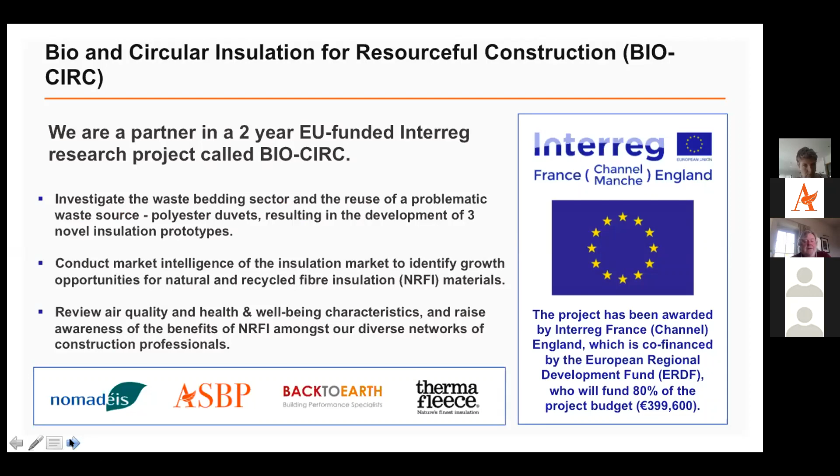So we've got a few upcoming Alliance for Sustainable Building Products events for your calendar. You'll know that the Environmental Audit Committee has called for an inquiry into the sustainability of the built environment, and that consultation is open now. I urge you to look at it and respond to it, and we will be doing that. It's a very broad ranging inquiry, and it's not necessarily that we're going to respond to everything, but we're going to have an event discussing it in more detail. There are a number of different subsections that have been broken down, so we'll look into that in more detail and help you put in your submission.

On the 10th of June, we've got an event with CIBSE on TM65, looking at embodied carbon in building services, often overlooked and forgotten, but you'll find it's a big chunk of the pie when it comes to embodied carbon. Then as part of Circular Economy Week London, we've got an event looking at metals and the circular economy, and there's some quite encouraging stories to tell about how the circular economy is working.

And then around July time, we're not quite sure of a date yet, we're going to be looking at timber innovations across Europe with Nature Plus, our colleagues in Germany. We'll give you more information. Sign up to our newsletter, of course, to be kept up to date.

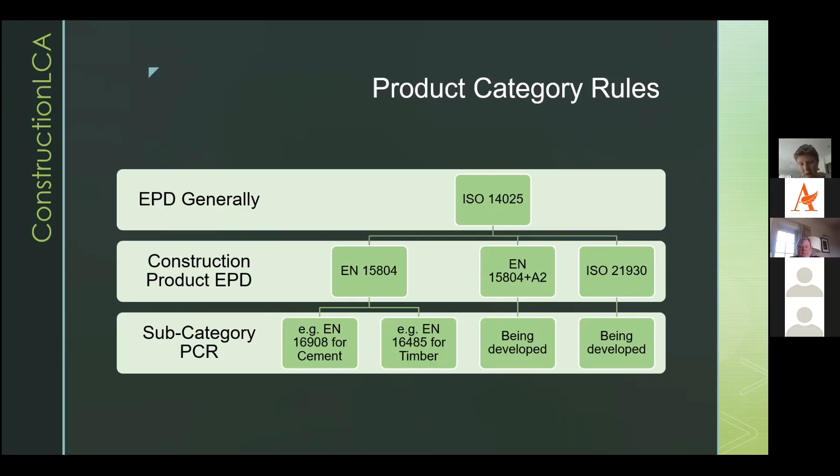And in terms of product category rules, for EPD generally, there is a standard called ISO 14025, which sets the rules for all EPDs, but it's really quite loose. So if you did an EPD to 14025, you could really still decide how you wanted to assess your product. So because of that, we've developed the product category rules for construction products EPD, and that's been done in both Europe with European standards and internationally with ISO standards. So we have EN 15804, the first version, and then EN 15804 plus A2, which came out quite recently and which is starting to take over, and then this ISO standard.

Effectively, the rules for all of these are very similar, so at least if you're looking at global warming potential, so just embodied carbon and the carbon impacts of products, these are reasonably interchangeable. The core rules are the same. There are some differences between these two standards in terms of the indicators, and I'll talk about that. Other than that, there aren't real differences, and this one also makes quite a lot more information and detail mandatory. And then underneath that, we have what we call subcategory PCR.

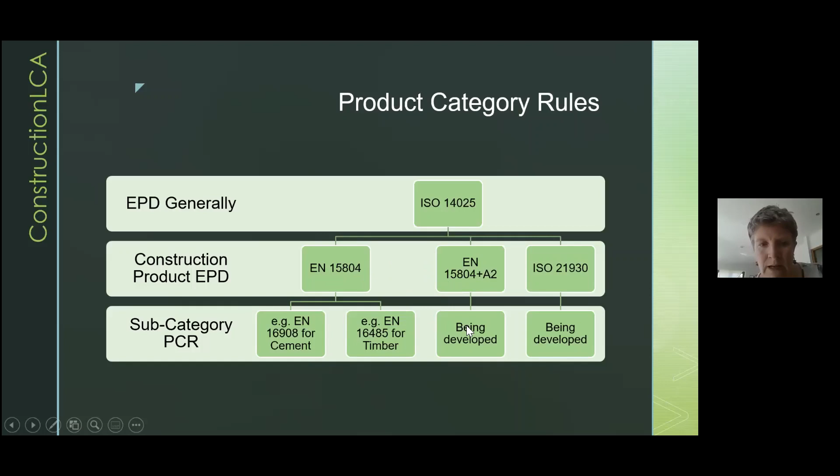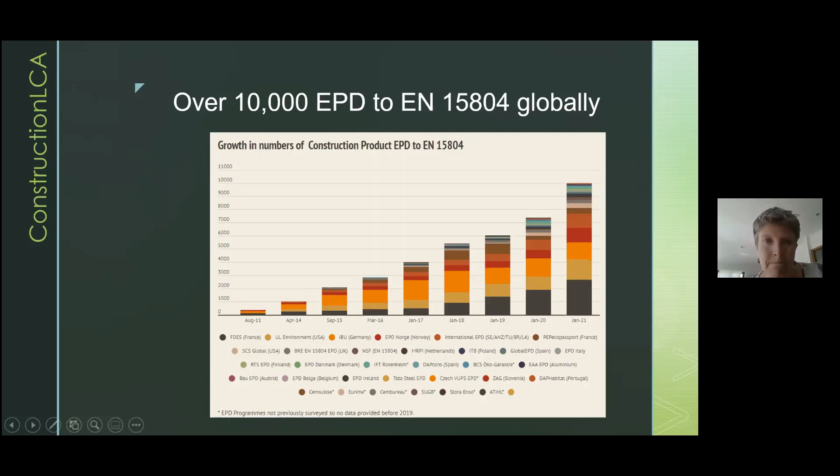There are lots of EPD now available, so I've been tracking the numbers, and we're now up to just over 10,000 EPD. These are the number of EPD actually published and registered as PDF documents. Some of these EPDs themselves cover lots of products, so there are a lot more products covered by EPD than just that 10,000. And then there are EPD tools that allow manufacturers to provide specific data for a product on demand, so there is lots more information than is shown by this. For example, in North America, there are 1,000 EPD that cover 25,000 products. And in France, you've got 1,300 EPD that cover 67,000 product lines. So there is quite a lot of data out there.

We have got lots of briefing papers that we've produced with the ASBP. So if you've got more questions, have a look there. They cover what EPD are, how to use them, where to find them. And then we have an online list of EPD for UK produced products, which you might find useful.

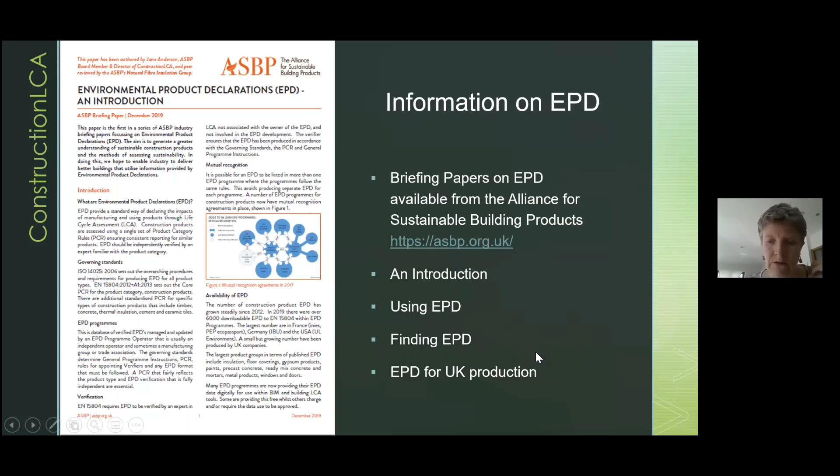Okay, and just a quick overview. In terms of EPD programs, there tend to be EPD programs all over the world now. Across Europe, we have an organisation called Eco Platform that tries to ensure that all the programs have a high level of checking of the data, that they make sure that the verifiers are well qualified, and that they're following the Eco Platform guidelines for verification, which are detailed and go in excess of the standard in terms of their requirements. So Eco Platform is a good place to look, and they're now moving to list all the EPDs that are produced by Eco Platform members.

There are other program operators, and they're listed in one of the briefing papers. There's also data available through national databases, so generic data that isn't an EPD but is the typical impact of those products. There's lots of digital resources now, and then trade associations provide EPDs through their own programs sometimes, and then manufacturers' websites as well. So are there any questions?

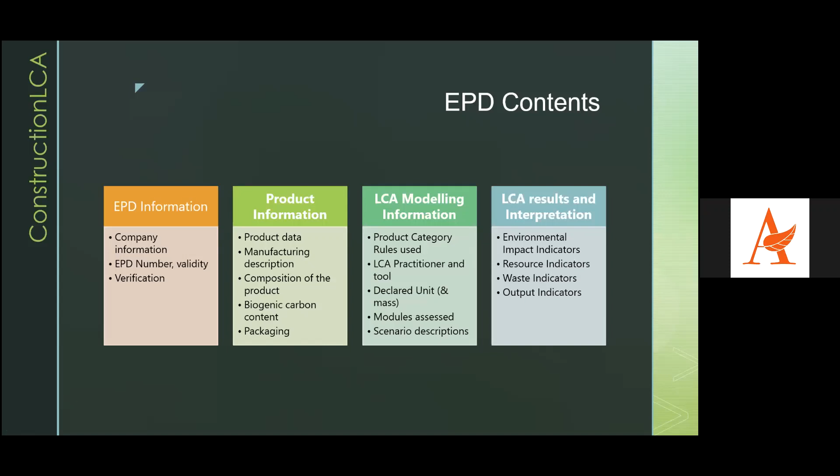I can see there are some questions. We've got a couple of questions, Jane, so we'll have a pause there. Morning, guys. I've got a quick question. Can we unmute them? Let's just see if they have a mic. If not, we can perhaps ask it for them. Sure, brilliant. Can you see this one, Jane? Perhaps do you want to read it out yourself? Is that easiest? Okay, sorry.

Could you say anything about EPDs and their visibility on systems like the NBS? I can't say anything about the NBS, actually, I'm afraid. I know that the NBS are aware of EPDs. Hopefully now that lots more of them are available digitally, that's going to be something that will improve. But I don't know.

Just remind us, NBS, what that stands for, and who runs it? National Building Specification. It used to be owned by RIBA, but it's now an independent organisation. It provides default specification and tools. It would certainly be good if it linked, and that would enable you to specify on the basis of information in the EPD. But I have talked to them, and I know that they do know about embodied carbon and are looking at it. Hopefully it will come in if it isn't there already.

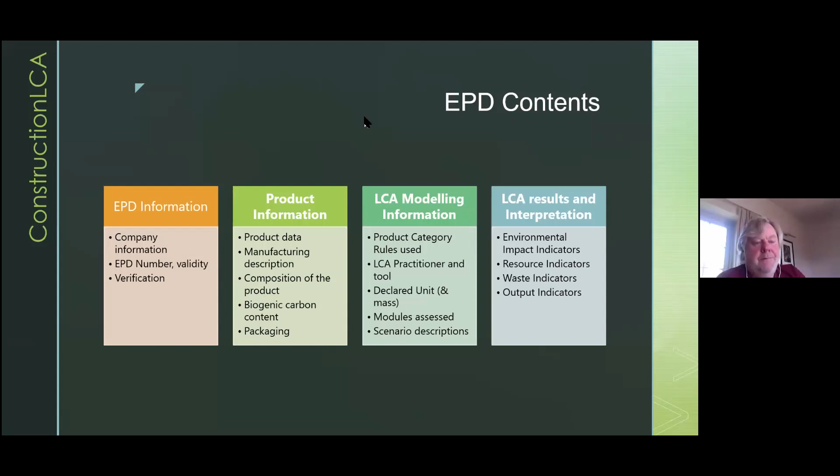The waste indicators, can I do that when we get there? Absolutely, okay, because I've got a bit on that when we look at some EPDs. All right. Brilliant. Thanks, Jane. Thanks, everyone. No, that's fine. Okay.

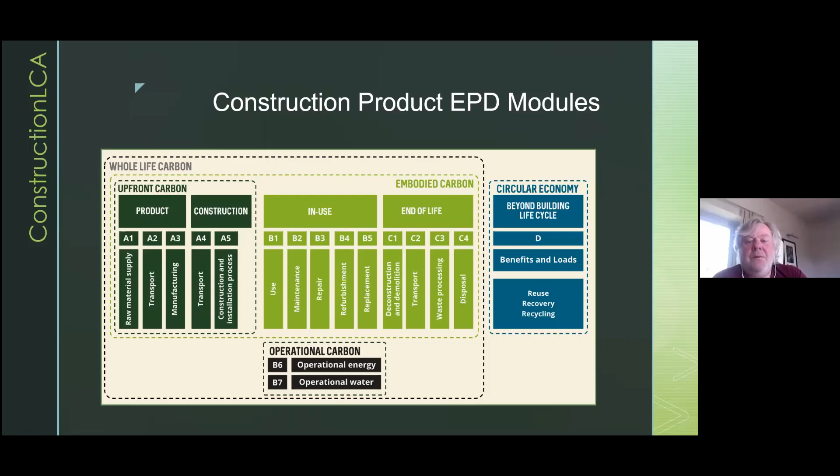I would say it's reasonably clear. When you say clear. We will look at some. Nicola, I don't know, do you have a microphone? Richard, can we maybe unmute? Yeah, that was really great. Thank you so much. Brilliant. Yeah. Okay. Yeah, so really helped me. Does that not mean you have more questions? No. No more questions at the minute. No, thanks. Okay. All right. Thanks, Nicola. I think we are going to have to hurry on, I'm afraid. Sorry. Okay. All right. I've got a couple of questions from Rabina here. Okay. But we'll come to them. She's a bit confused about module D, which is reasonable, I think, but we'll come on to them. Yeah. Otherwise, well, we're not going to. It's going to take too long, I'm afraid. It's all right.

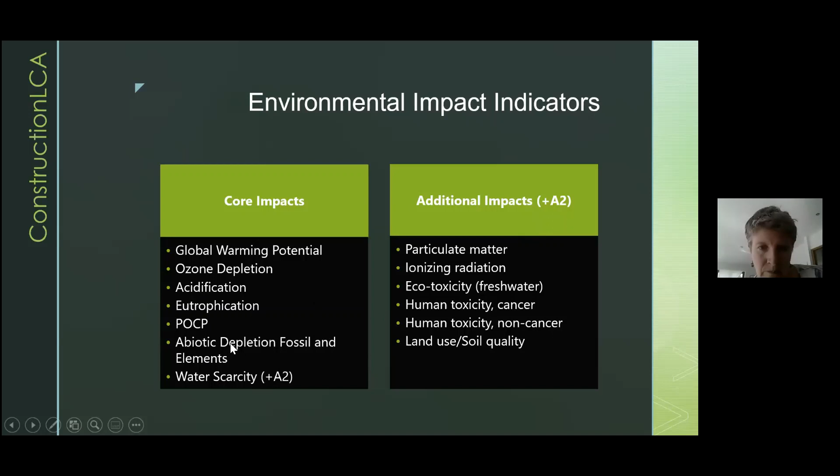So just in terms of impacts, these are the core impacts that are in both versions of 15804 and also in 21930, and these are the additional impacts that are now measured in the new version of 15804. The thing to know, though, is that quite a few of these indicators are measured using a different indicator now, so you can't compare them, but you can compare the GWP. So embodied carbon will be the same.

And yeah, this is just looking at an EPD for 15804. And when you look down here, the big difference, you need to provide much more detail now about your global warming potential and break it down into fossil, biogenic, and what we call land use and land transformation. So the impact of any changes in land use. And you can see here, for example, this is a timber product, so it's actually showing you the benefit of your biogenic carbon impact here, the storage, so that's why it's negative here, and then you've got the fossil and land use.

And you can see here that these indicators for acidification, it's a different unit. The eutrophication is broken into 3, and that's a different unit as well. So yeah, that makes it a bit more difficult if you're doing life cycle assessment. But in terms of embodied carbon, this total is the same as you would get in this EPD.

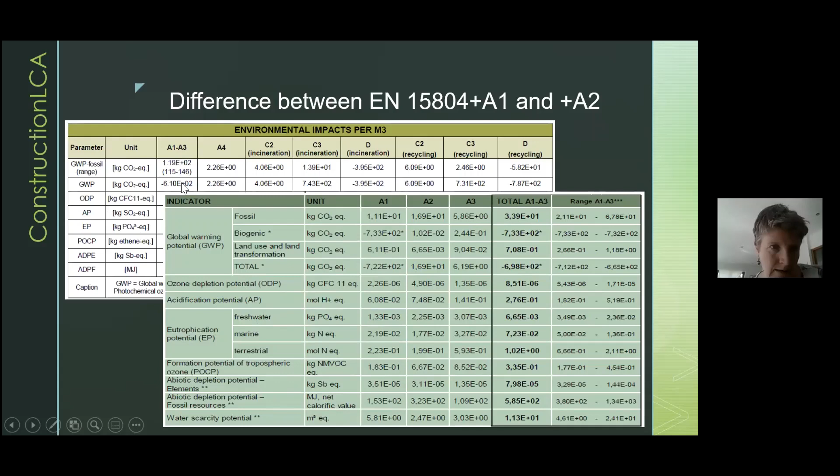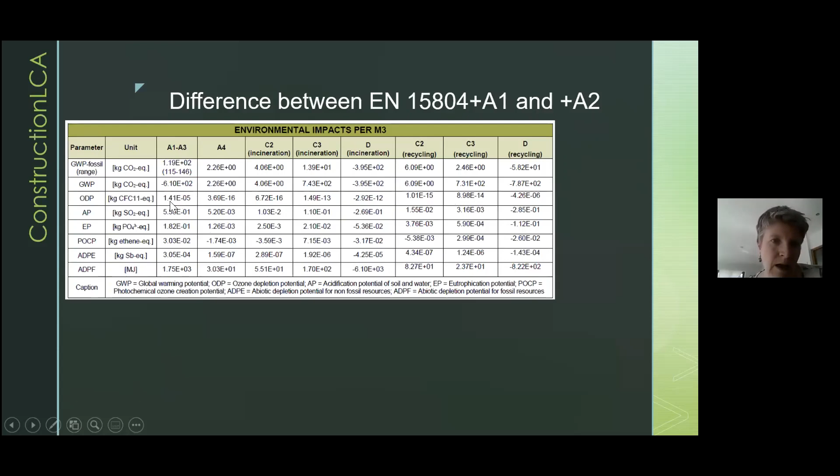Okay. Just in terms of reading an EPD, if we go back, you'll see here they quite often say 1.41 e to the -5. Basically, it's a way of providing information about the number in a more concise way. Otherwise there would be lots of noughts, and that makes it very long and takes up too much space. So EPDs do tend to use this scientific notation, so you just need to be aware of it.

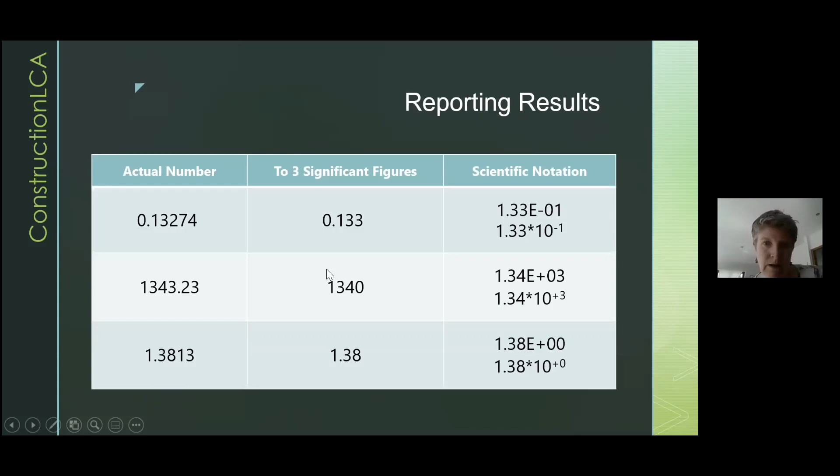So basically, if this was the actual result, they should always be providing it to 3 significant figures. And then in scientific notation, if it's 0.1, it's times 10 to the -1. And you can think of it as the number of times that you've jumped your decimal point. So this one, you go 1, 2, 3. So it's 10 to the 3.

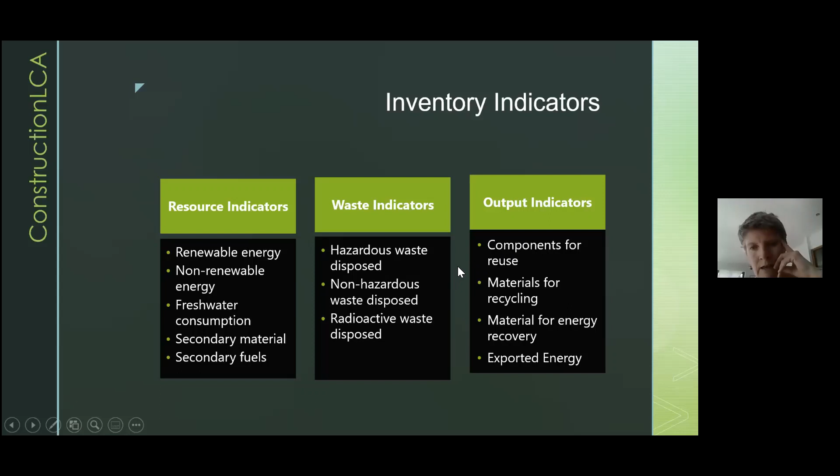These are the different indicators that cover energy. There is one that tells you how much energy is in the product. So for plastics, that would be the primary energy non-renewable, and for something like timber, it's the primary energy renewable, and it's basically calculated as the energy content of the product, the amount of energy you get if you burn it.

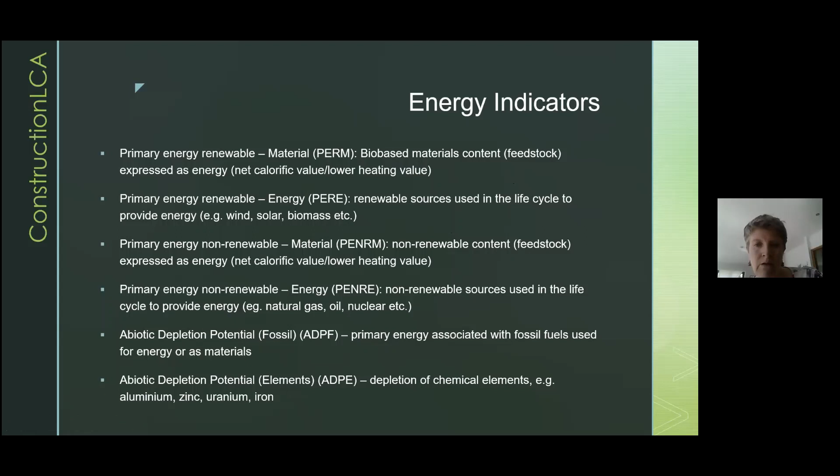You've got the other measure of the energy that's being used to make it, and then there's a separate one here that covers primary energy just from fossil fuels. So non-renewable also includes nuclear energy. And that's just a table. You'll have these slides and you can have a look, but it just tells you where different energy comes from.

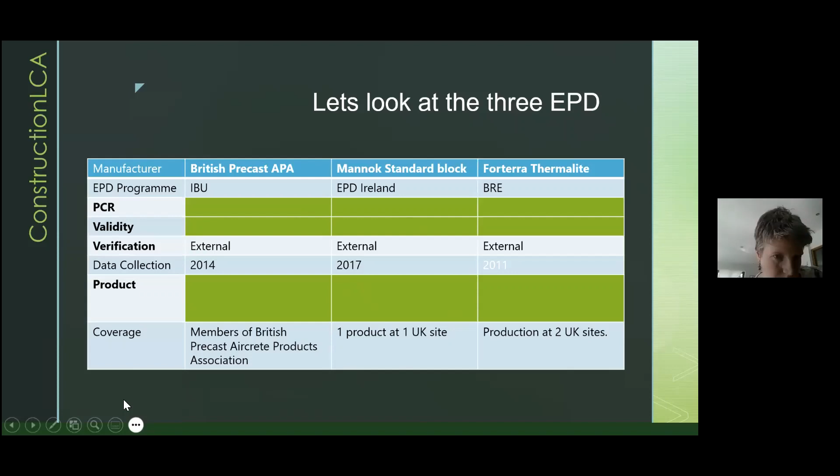So we've got 3 EPD. I'm just thinking how much time we've got. 20 minutes. I don't know that we've got time to actually... Well, let's just see how we get on. Yeah. We can go into the Q&A maybe, Jane. Yeah, okay. So how to do this quickly. If I stop sharing this and go to my screen. So do you see an EPD now? We do, yeah. Oh, that worked.

Fantastic. So this is an EPD for a thermalite block. Okay, so I'll do it with this one. You can see this EPD, this is the number of the EPD. This was the first EPD that came from the BRE program to 15804. This is the manufacturer, Forterra, and it tells you there the standard that it's using. It tells you what the product is, and it gives you the name of the company and address.

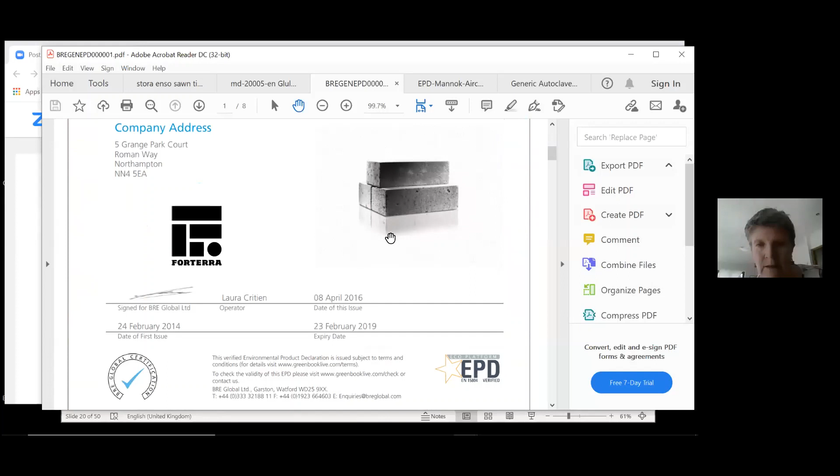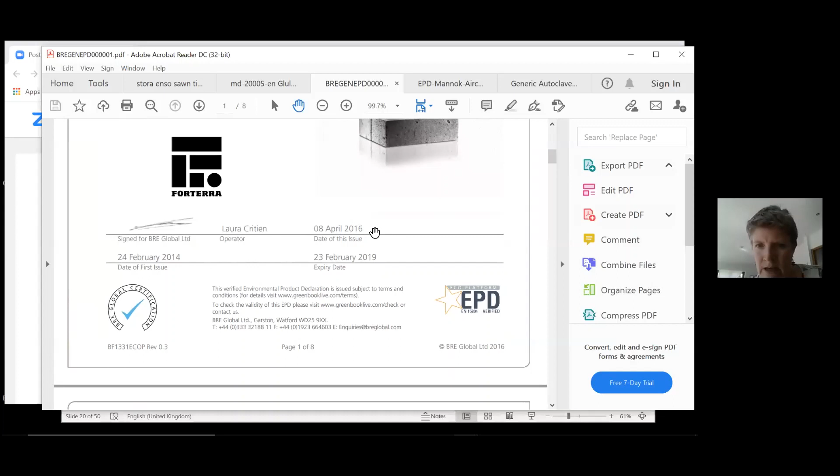And there's a picture of the product so that you know what it looks like. That's quite useful with products that are in foreign languages. Sometimes you can just quickly go, oh yeah, that does look like what I'm looking for. This gives you the validity. So this one is 5 years, but it got updated for some reason. The company might have changed its name, I think.

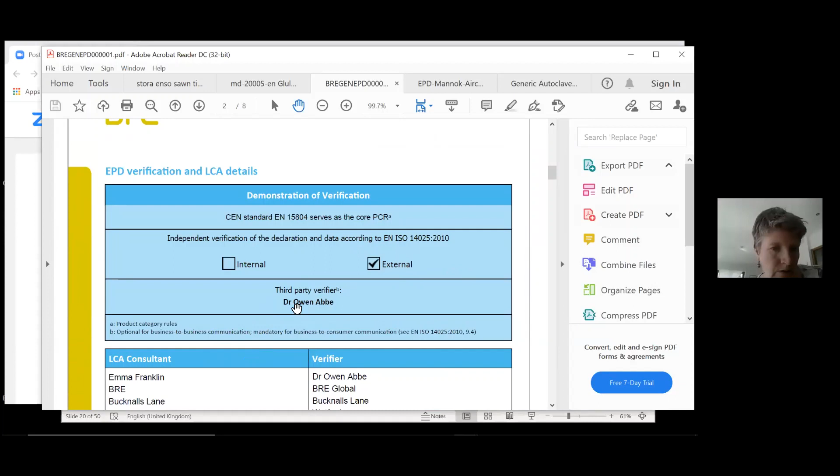And this is the verification. So this used an external verifier, somebody that doesn't work for Forterra. They do actually work for the LCA consultant, but heck, it's one of my problems. Yes, it's a bit close, isn't it? But it has been verified, basically. It tells you here it's for a ton of the product. So all these results are going to be for a ton, and it covers 2 sites.

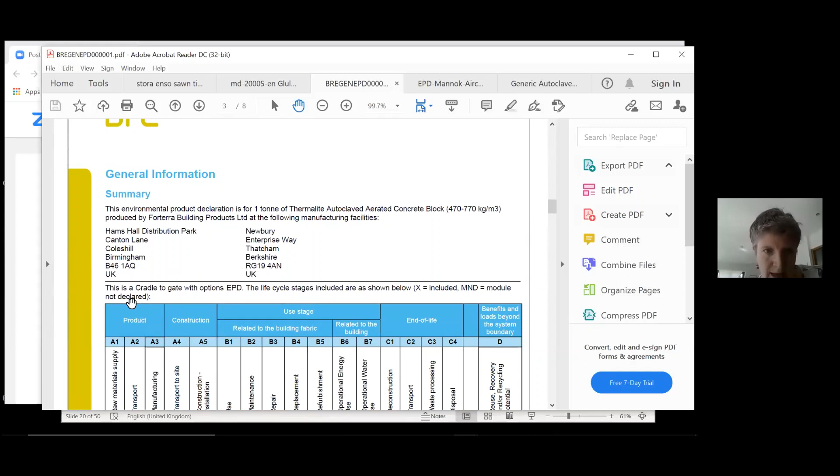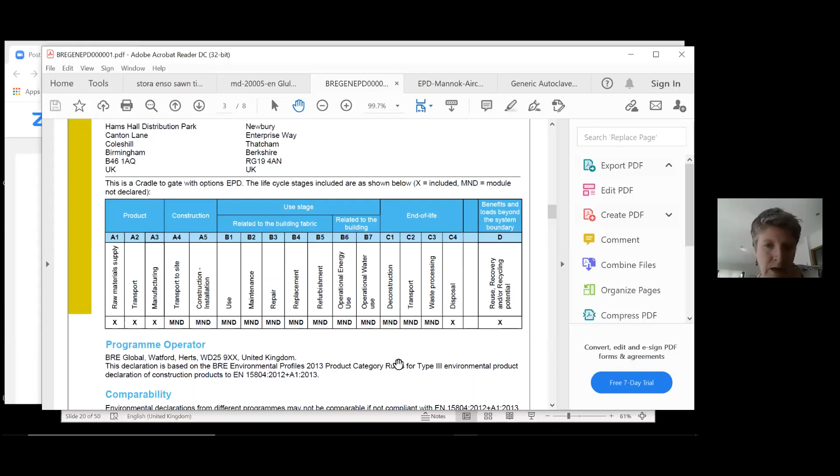And it's what we call a cradle to gate with options EPD. So it tells you the impact of manufacturing it and disposing of it in C4. So it's not going to show you recycling from it, at least based on what it says here. And it shows you the benefits in module D. So possibly there's a mistake here, because you shouldn't have a benefit in module D if you've not recycled it. But we'll discuss that.

So that's the information about the program operator, and it tells you that it's based on their product category rules that relate to 15804 A1. All EPDs have this statement, and basically it says you shouldn't use the data for comparison if you're not comparing it to a 15804 EPD. At the time it was written, there was only 15804 A1. Now there is 15804 A2. So you would be able to compare, as I said, the GWP, but you can't compare the other indicators if they're using different units, because they don't correlate.

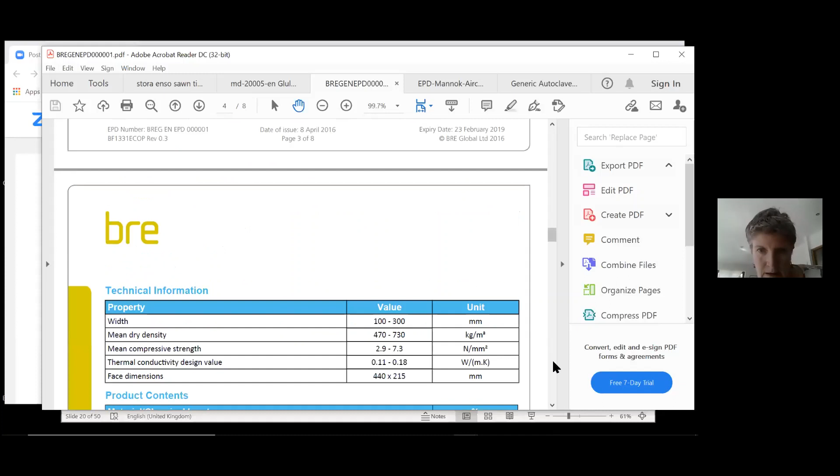It tells you about the product, what it's used for, and some technical information, which is useful, and then what it's made of, which can help you sometimes if you're trying to work out why one product looks a lot better than another. For example, you could have a look here and go, this product doesn't use as much cement as the one that I'm using, and cement is a big impact, so that might explain it.

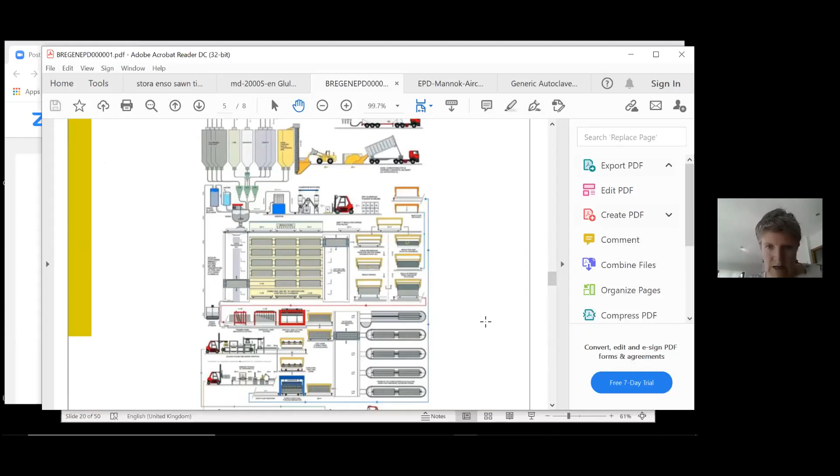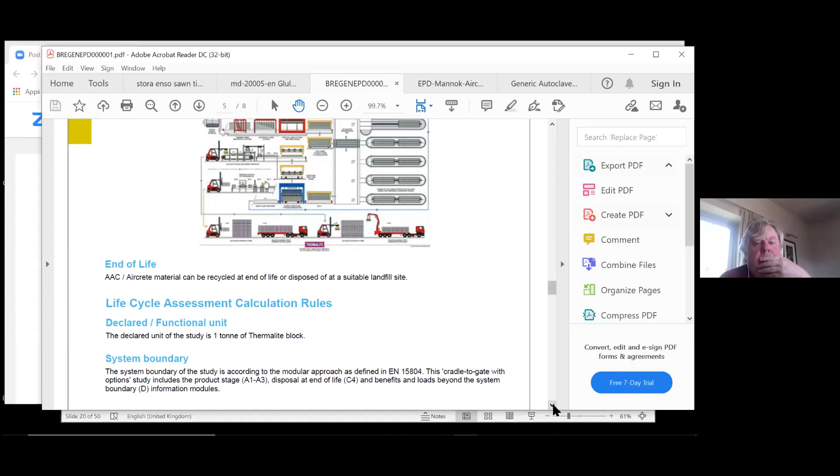It tells you about how they're manufactured. There's not very much information here, but there might be a picture with very tiny wording, so you can't read it, but kind of a nice, complicated process. What does PFA stand for, Jane? Pulverized fuel ash. So it's what comes from power stations, and it acts like cement. But it's a byproduct of coal-fired electricity.

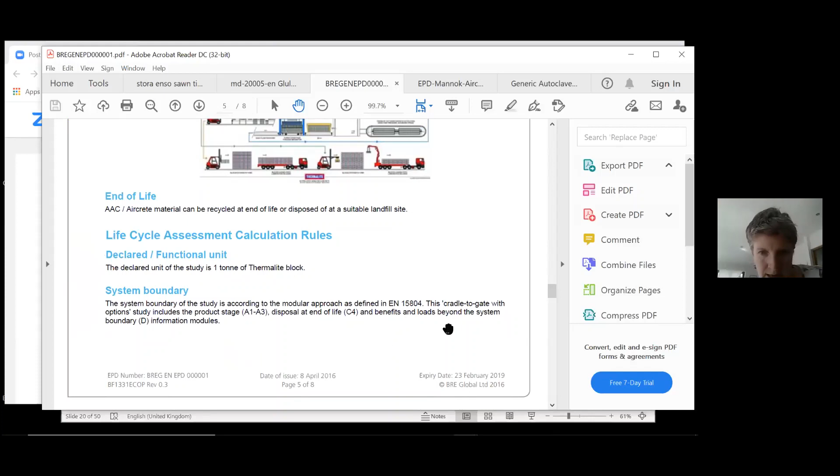So you've got here, it's 1 tonne of Thermalite block, and then it tells you the boundaries. It tells you where it got the data. So it tells you that it collected the data for the Forterra site in 2011.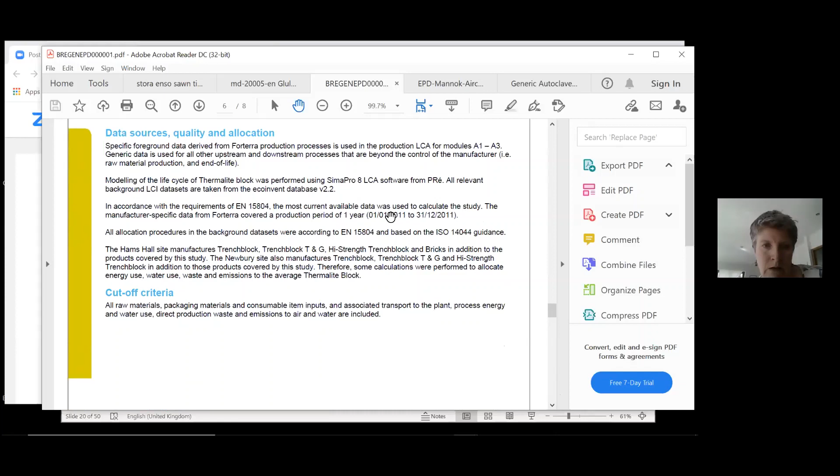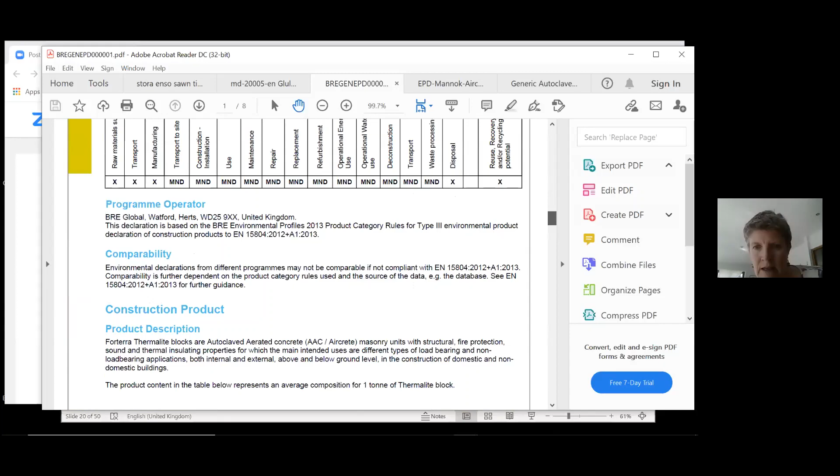So quite a long time ago—actually, if we go back here, this EPD expired in 2019. I've used it because this data is quite old, but it's got lots of information in it, basically.

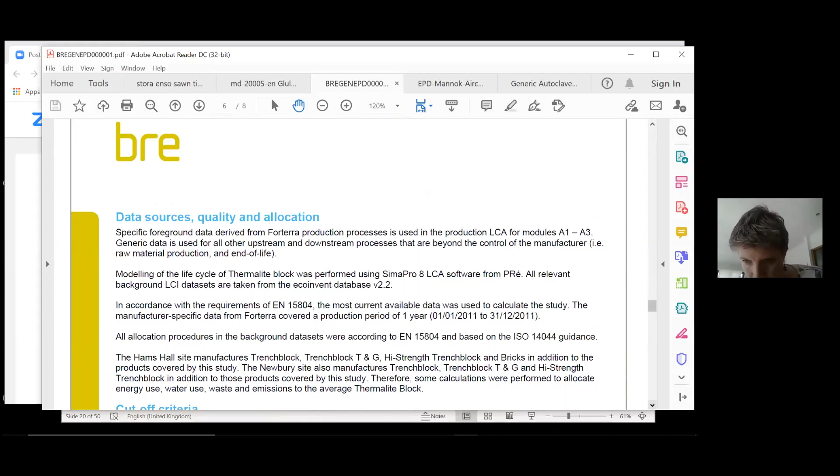It also tells you that it used SimaPro and EcoInvent 2.2, and now EcoInvent is at like 3.7, so the data is updated. This is another reason why it's no longer valid, although generally things have got better over time, so it's not such an issue to use an older EPD if you can't find anything else.

So this EPD does aggregate—you don't have to break down A1, A2, A3 and show the individual impacts. You can aggregate it and just show it as one collective impact for the whole cradle to gate. It is here saying C4 disposal.

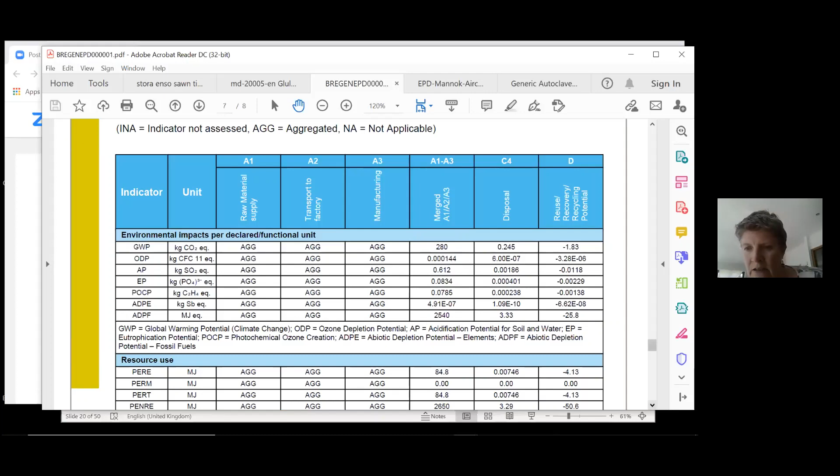This figure here, 280 kilograms of CO2, would be the figure you'd use for your upfront embodied carbon, or cradle to gate embodied carbon, if using it in a building level assessment. You'd have to generate your own data for getting it to site and wastage, because it doesn't tell you. You can see most of the energy they use is primary, non-renewable energy—they're using a small amount of renewable, probably from the grid mix electricity.

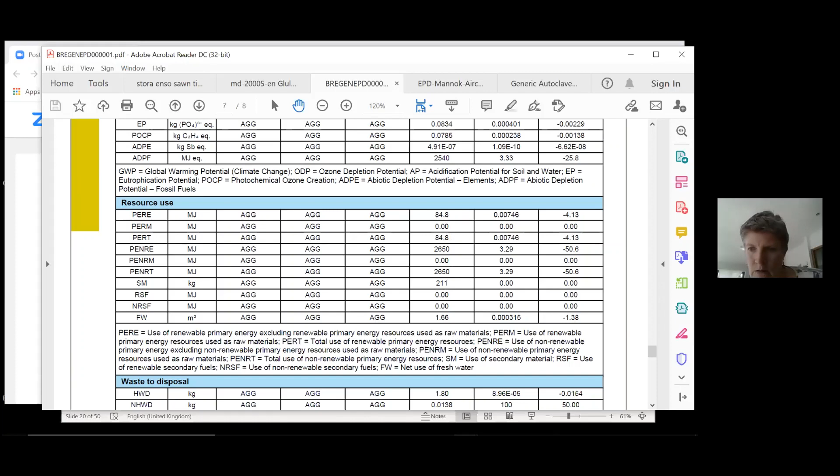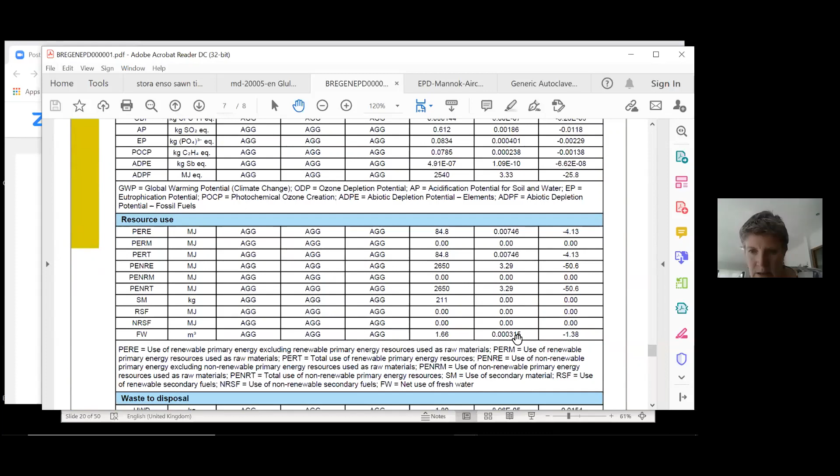This was for one ton of product, I think. They're using 211 kilograms of secondary material, waste material.

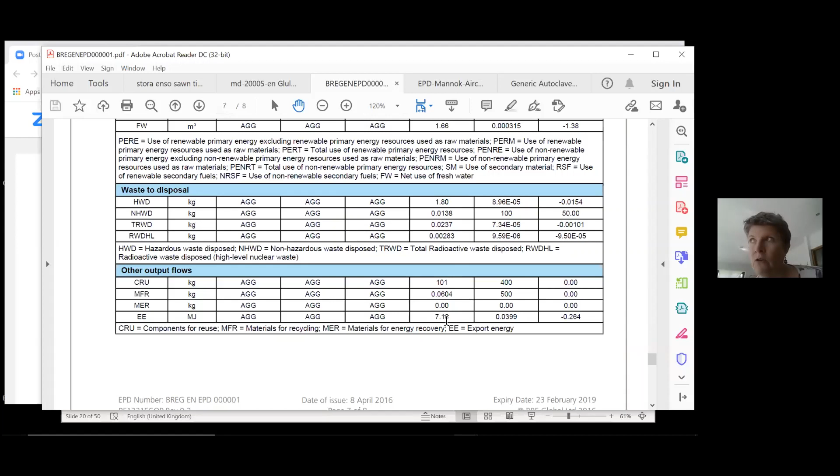And they produce a very small amount of waste, most of which is hazardous. But they do produce 101 kilograms of waste that is reused—I think that's the waste blocks they make. They sell those, and they're used as a lightweight aggregate, if I remember rightly.

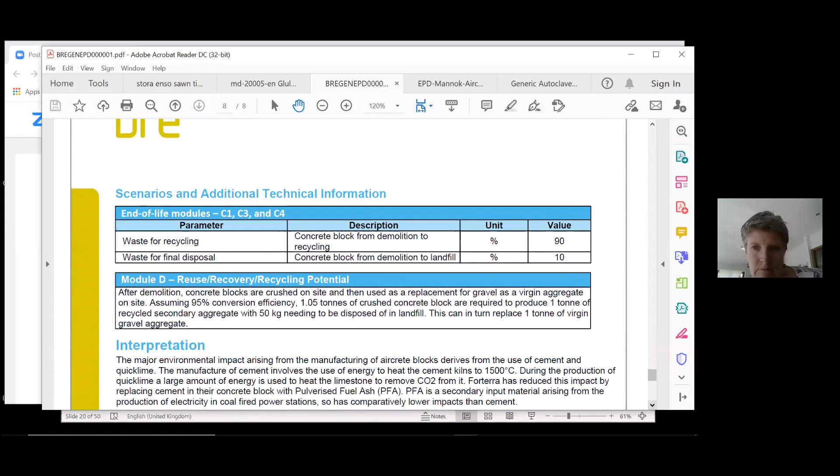Here they're actually saying 90% of it is recycled, so that should go into C3, since C3 is recycling and recovery, and the 10% that's landfilled should be in C4. I might send a letter, but the EPD is expired, so it's not really relevant.

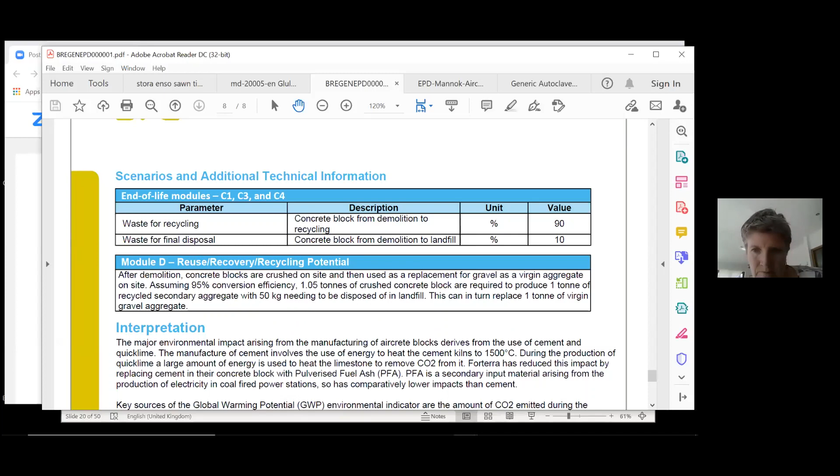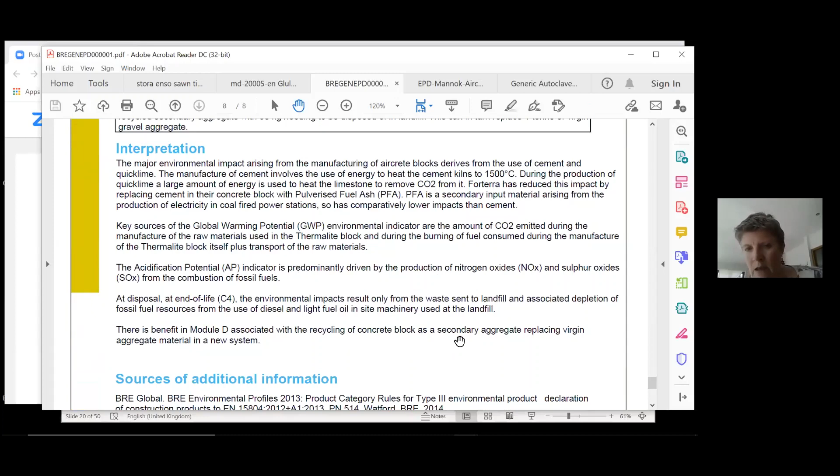They do tell you a little bit about where the impacts come from—most of it is from the use of cement and quicklime. The benefit is because they can use the recycled block as an aggregate instead of having to use new aggregate, but it's a small benefit because aggregate has a very low impact.

So that's just running through the EPD. If we look at another one very quickly, this one is for an Irish aircrete block, a similar product, but this one is just for a kilogram. So you need to remember that you'd have to multiply by 1,000 to make a comparison between them.

Or the better way of doing it—since most times when you're using block, you're making a wall that's 100 mil thick, for example—it's actually the density. You need a particular volume of the product to make the comparison, so you need to go back and look at the density of the products to use that to get the volume of the product you'll be using.

The other thing to take into account, because these are aircrete blocks with thermal performance giving some insulation, is that you need to consider that. Making a straight comparison without looking at thermal performance could give you the wrong answer—one might seem better, but you'd lose more heat with it over the lifetime of the building. You'd need to account for the additional insulation required to achieve the same thermal performance.

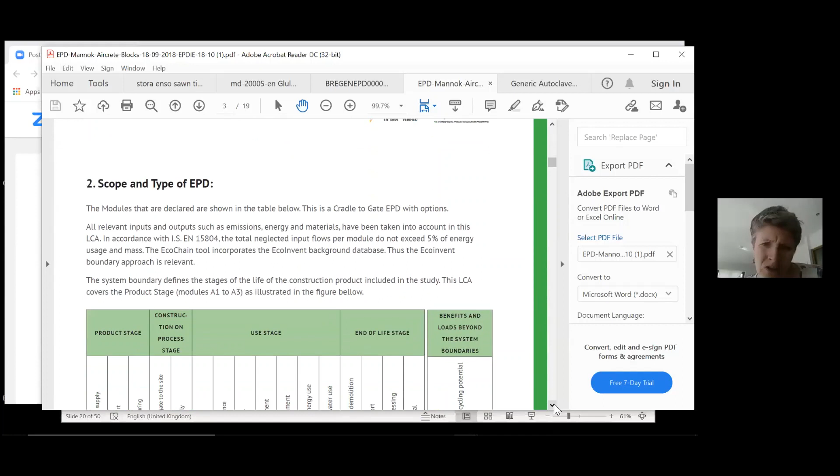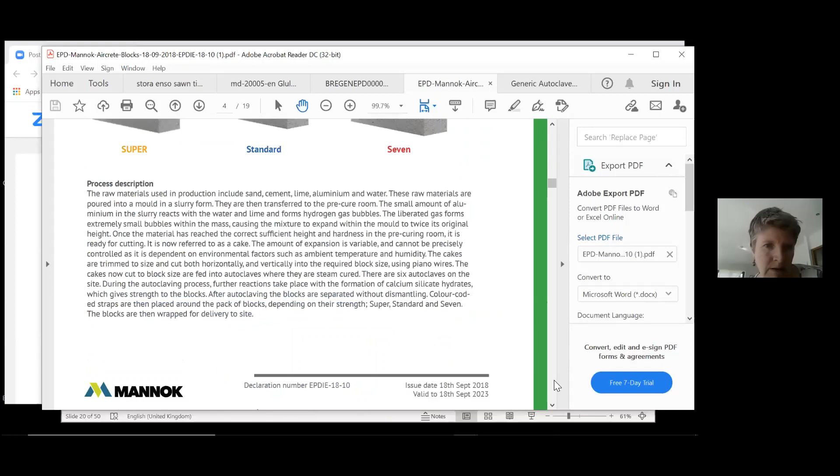This one uses a more recent version of EcoInvent, and it's also been verified by me, so it's super duper. But this one just provides the cradle to gate, so there's no more information. It's got the same sort of information, a different type of picture, and then you go straight into the results. This one does break down A1 to A3 and give you that information, but then it doesn't give you the rest.

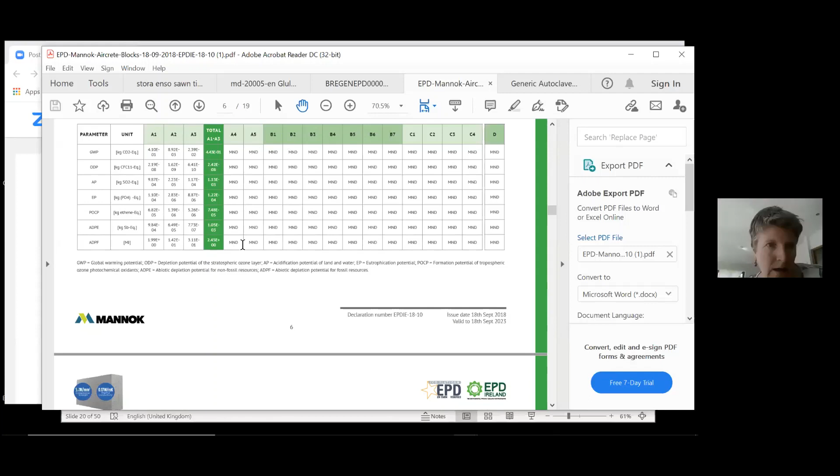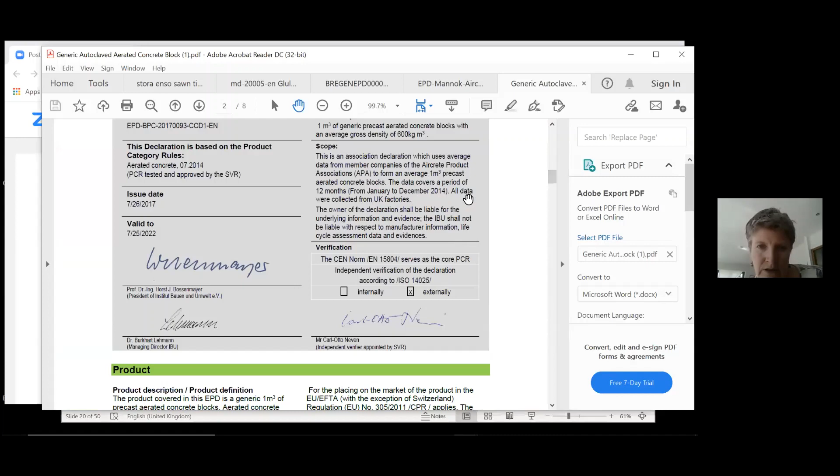That's all you need to see here. There's another one, a German one, which is the typical UK product from the Trade Association. This tells you how the member companies produced it, so it's their average, and it's done for a metre cubed, for 600 kilograms of the product weighing 600 kilograms per metre cubed. That's basically how you can start to compare.

Are there any questions? We've got a few questions, but we can leave them to the end, I think. Okay, all right, sorry, thank you.

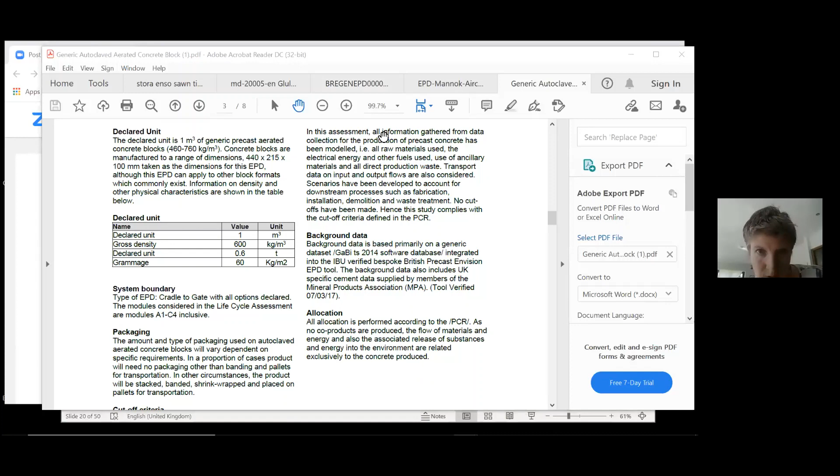Let's go back to the slides. They should always provide verification information. This shows you the different dates and validity, when the data is from, so it's worth looking at and knowing how recent the data is. You can see here that they've all used different information about how much.

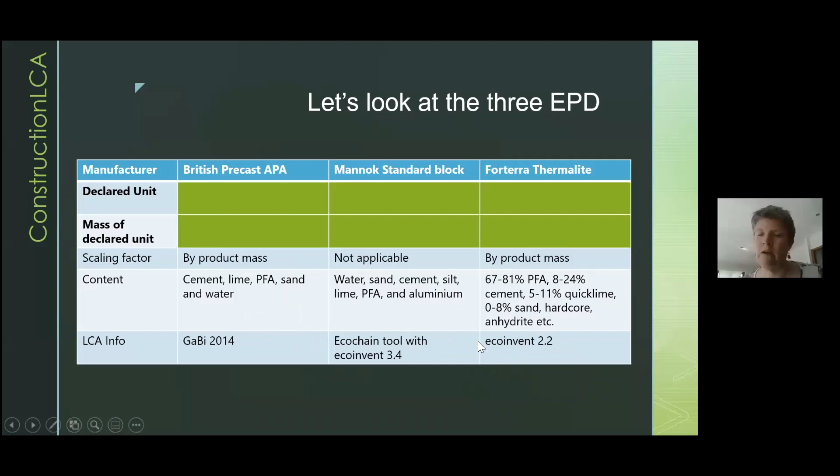Can you make the slides a bit bigger, Jane? Can you put it on? Yeah, sorry, no, I'm on back onto. There you go. Thanks, Steve.

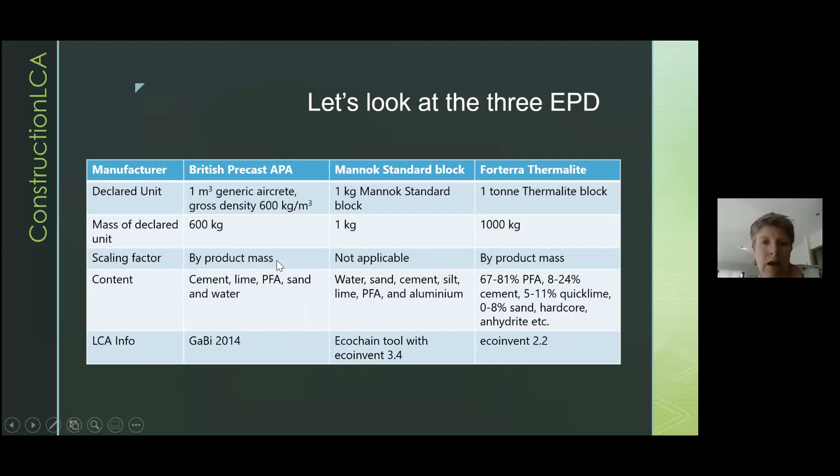You can see here that they've got different units, so you need to adjust for that. Both of these tell you that you can use a scaling factor, so if you're using a product with a different density, you would basically scale it by use of the product mass, if that makes sense.

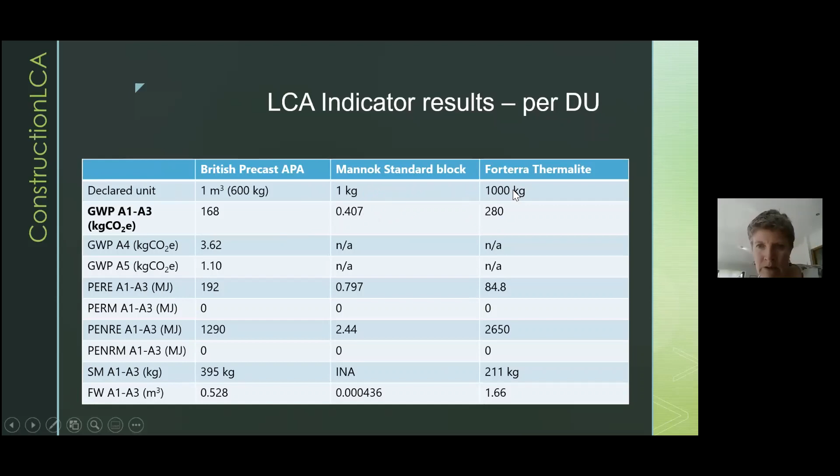This is showing you the results based on the indicators that they've actually used. You can see there's a big difference here between these two, because one's for a kilogram and one's for 1,000, and this one's for 600 kilograms. Here I've done it all for 1,000 kilograms, and on that basis for the mass you can see that British Precast and Forterra are very similar, while the Mannok is different.

Looking at what you can see from British Precast, which does lots of the different modules, the impact of transport is really quite small in comparison to the impact of the product. Interesting to start seeing that, and the waste is small too. You can also see that British Precast uses a much higher proportion of secondary materials than Forterra did per ton.

Just a very quick thing, we won't do this as a quiz, but effectively, just because a product has an EPD, you need to remember that doesn't mean it's a good product. All the EPD does is tell you the impact of the product, then you have to look at it to understand whether or not it's a good product.

EPDs should always be verified by somebody independent, and if they're not verified, you really shouldn't regard them as an EPD, and you should encourage whoever it is to get their EPD verified. I verify EPDs myself, and it's very common to find mistakes that have been made, and people that have misinterpreted or misunderstood things. So the verification process is really important.

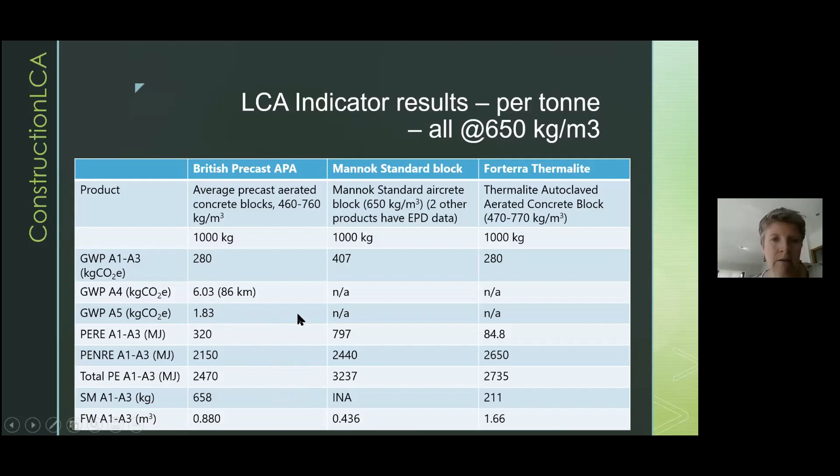If you know on your site you're going to have different wastage because your contractor measures their waste and can show you they typically have a very low wastage rate, then you can adapt that information based on the waste they provide. For example, at end of life, if you've designed your building for deconstruction and it's a product that makes a big difference, you can change that information. But if you've done nothing, you should basically use the typical impacts.

Just finally, EPDs are very expensive - not necessarily. Some are, but there are much cheaper ways now of getting EPDs using EPD tools.

But that's really for another day.

Very quickly on biogenic carbon - this is the carbon that comes from biomass. In bio-based products, carbon has been sucked up from the atmosphere to make the biomass. Either it's plant-based, absorbing CO2 through photosynthesis, or for something like wool, the sheep is eating the grass which has done that, and then it's using that biogenic carbon to make the wool. So we're taking into account both the uptake of that CO2, the storage of it, and then the release of that CO2 at the end of life.

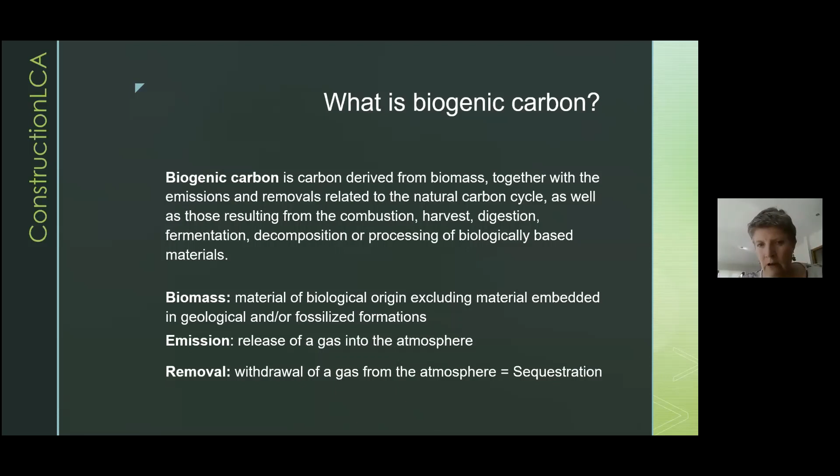Those two things generally balance, the uptake and the release. So we show it in the EPD as the uptake in A1, and then the release when that happens in A5 or in module C. We consider it differently from fossil carbon, and that's why in the new version it's shown as a separate line and then as part of the total - and that's why in upfront carbon we don't include it.

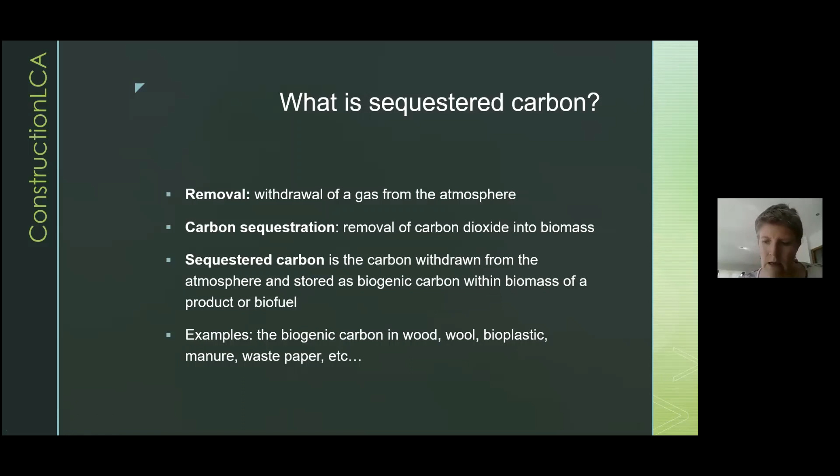So the sequestered carbon is the carbon that's been removed and stored in the product. In terms of measuring it, there is a standard that tells you how to do it for wood. You calculate the actual carbon content of the product, or the bio-based bit of it, and you can do that by looking at the chemical formulas.

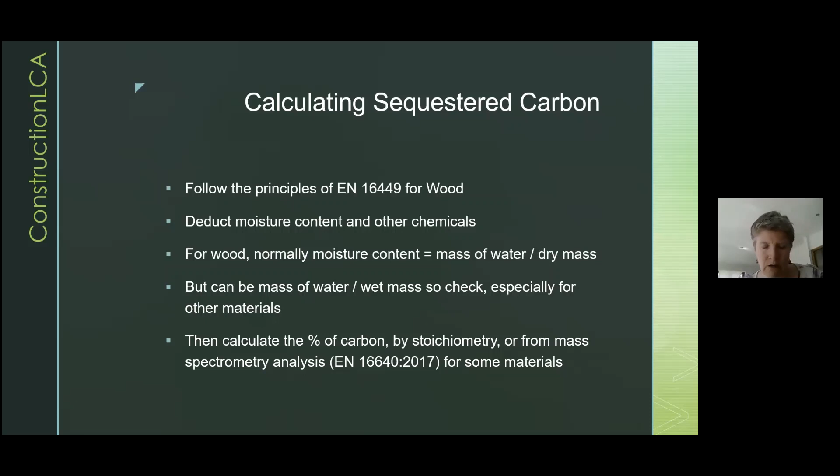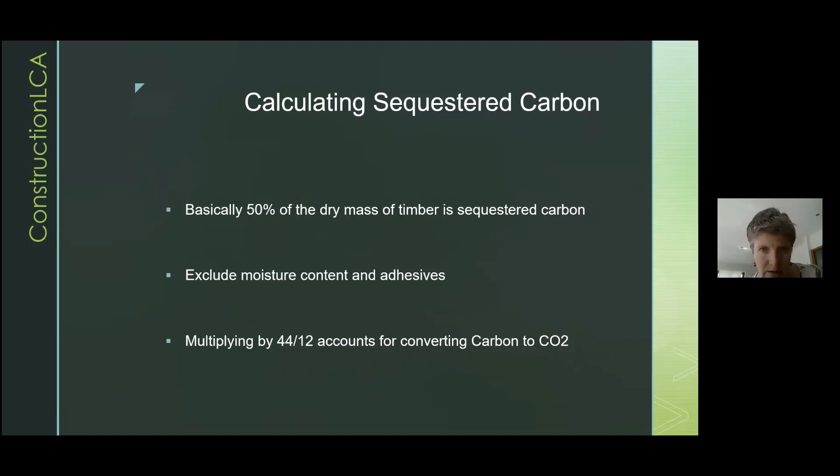For wood, you need to take out the mass of water in the product, and also things like adhesives. If you've got glulam, there's a horrible formula, but effectively for timber, half of the dry mass of timber is carbon. From the product information, it will normally tell you what's in it, and the moisture content, so you can take out the moisture content and the adhesives to get the dry mass of the timber. The mass of CO2 is 44 grams and the mass of carbon is 12, so you can use that to convert to CO2 - that's how you calculate your sequestered carbon.

We could look now. Let me stop very quickly. If we look at...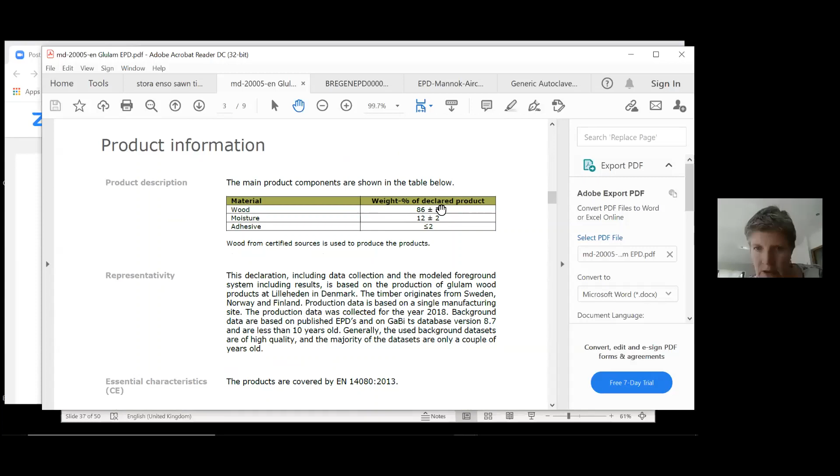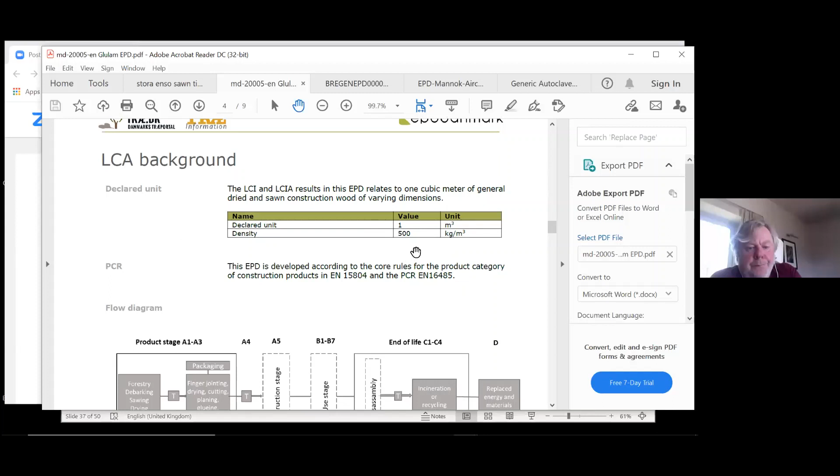If we look, this one is just doing A1-A3, it's got the transport, and then it's got the end of life, module D. This one tells you that for the product, it's basically 86% dry wood, 12% moisture, 2% adhesive. So that gives us our dry mass of the wood. It should tell us somewhere that it's got a density - so it's for 1 meter cubed with a density of 500. So we know 86% of that is the dry mass of the timber.

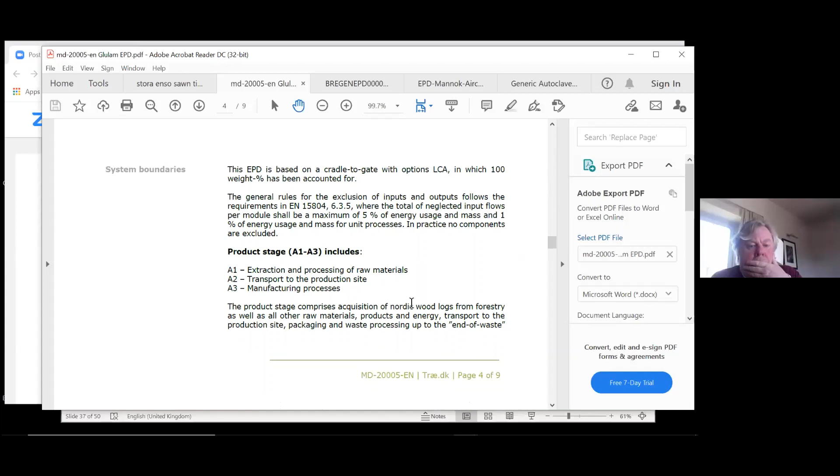These are the descriptions of all the things, and this one tells you that it's actually providing 2 scenarios, one for incineration with energy recovery and the other for recycling into particle board. And then it shows you the benefits of that. If we go here...

Just hoping this will work. So we know 500 kilograms is in the meter cube, times 0.86, because this is the mass of the dry timber. We divide it by 2, so this is the carbon content, and then we times it by 44 divided by 12. So 1 meter cubed of this glulam has 788 kilograms of CO2 stored into it. So that amount of CO2 has come out of the atmosphere and is now in the product, not in the atmosphere - that's a benefit all the time that we're using that product before it gets released.

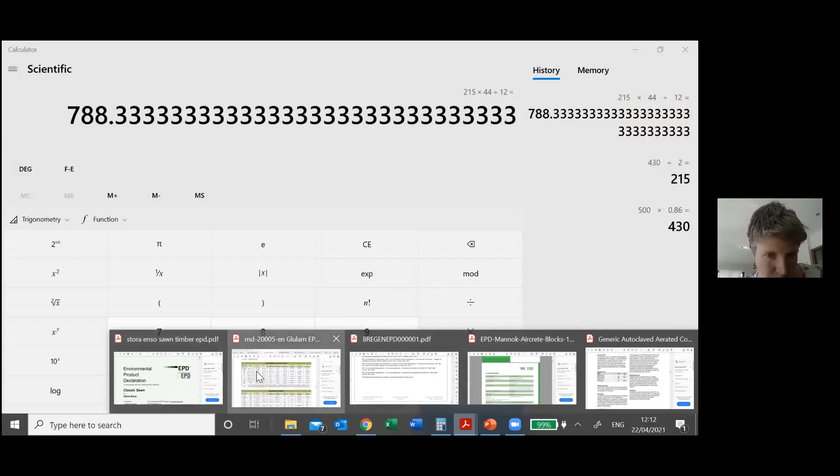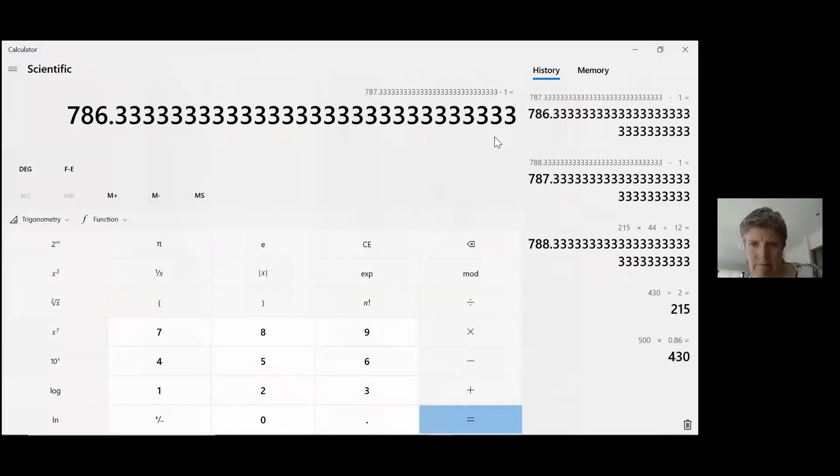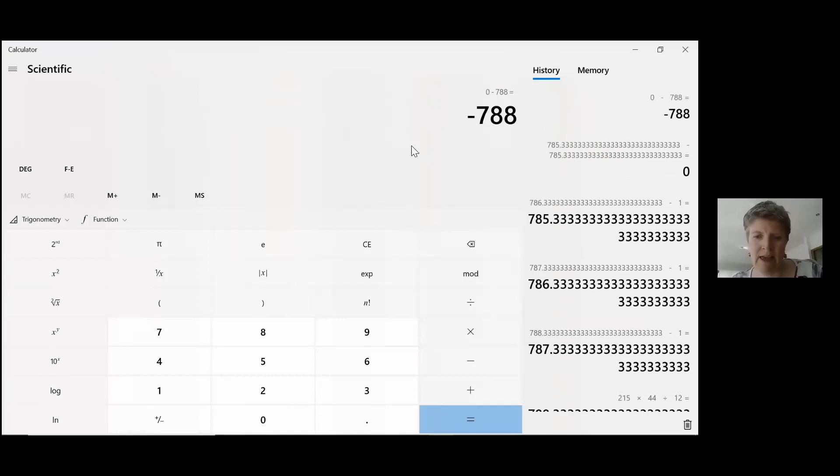If we then go back to the EPD here, you can see that it says the fossil impact here is 119 kilograms. So if I go here and times -1... so this is, it's not doing it, times -1... oh never mind. I hate this, it's like playing with pets and animals on live TV, isn't it? Anyway, so -788 - hopefully that, if I now plus 119, get to 669. So it's got that benefit, and then we're adding on the impact from using the fossil fuels to make it, and hopefully when we look at the EPD it's nearly the same amount. I'm not sure what I've done wrong, something.

But yeah, so that's a bit weird. Anyway, and then at the end of life here, you can see it's got these two, so one here for incineration and one here for recycling. In both of these, you can see there is an emission that's more or less the same, a little bit more for incineration. I'm not sure why actually, but I think they use a bit of energy to actually get it to burn in incinerators quite often.

And that is quite similar to the amount of carbon that we calculated. Should actually be the same. And then the benefit here in module D, basically when you recycle it, you don't need the same amount of wood, so it's showing a big benefit. And then in Denmark, their energy is not very carbon intensive, because they use lots of biomass and lots of renewables, biomass and wind, so there's a lower benefit. So it is actually better to recycle it than to use incineration.

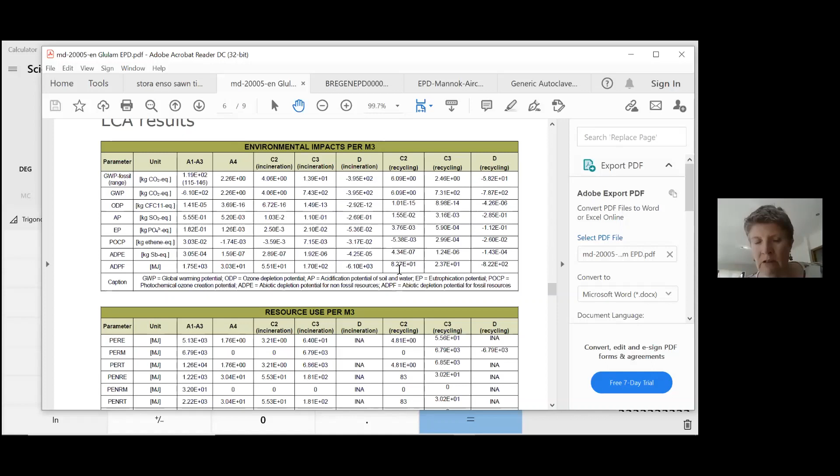In a lot of UK EPDs, it's the opposite. Although now, because of the benefits of using lots more renewables in our electricity, it has actually moved. It is now better to recycle timber than to use it for energy recovery. So that's good. Sorry, I've done that a bit quickly.

So yeah, at the end of life, if you reuse timber, you basically always have to transfer the benefit of the carbon that's stored in the timber. If it is released to the atmosphere because you burn it, then you need to put it in as a release and an emission. But if you are recycling it or reusing it, you still need to transfer it to that recycled product, so it still has that benefit, which means you have to put it into your system so that it balances, otherwise everybody would be double counting that benefit.

Make this full screen, Jane. Sorry. Oh, sorry, I keep forgetting to do that. Thank you.

Yeah, and if it goes to landfill, then you should look at whether it produces methane and what happens to that methane, and the latest version of 15804 requires that if there's any carbon still stored in the landfill, so if it hasn't decayed, you have to transfer that to nature. So you always end up with a carbon balance now.

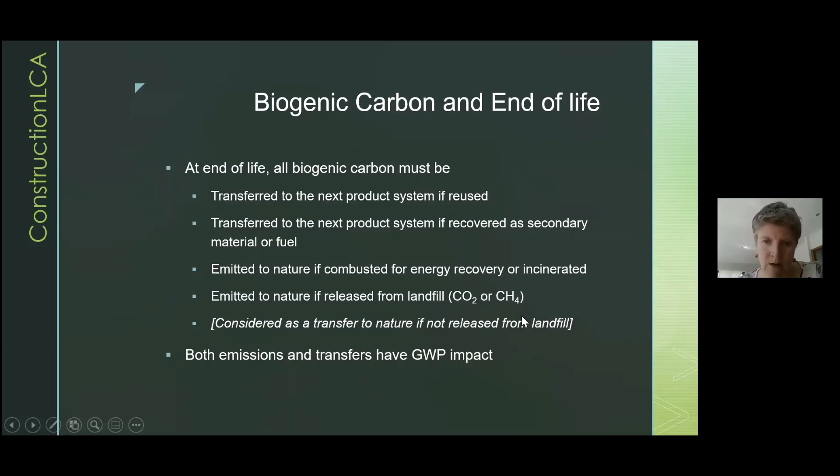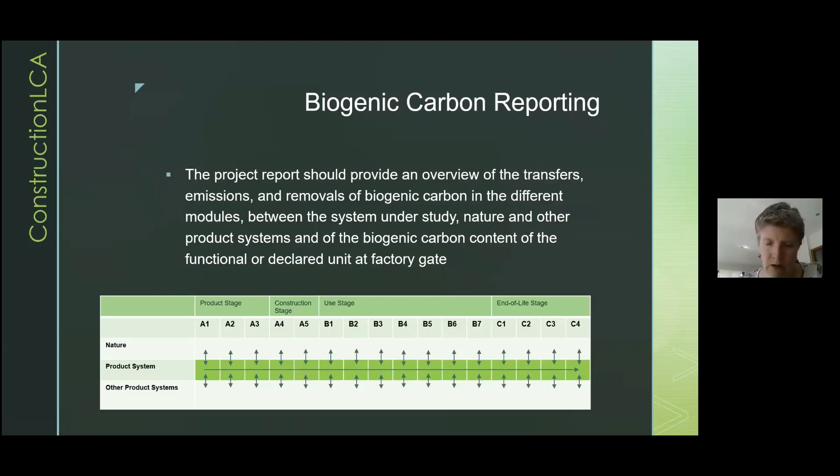There's now much more requirement in the new version of 15804 for when they do the LCA, that they have to really show exactly how they've tracked carbon. So hopefully we will get much clearer results in the EPD, and there's quite often errors with biogenic carbon, so hopefully we'll get less of that.

This is an EPD actually from Australia, and that's really helpful in explaining exactly what happens and where it happens. So that's the sequestration. These are all the impacts from the use of fuel, diesel in the forest, taking it to the sawmill, the actual sawmill, the kiln drying, which tends to be the biggest impact. A lot of the time they're using waste timber from the sawmill to actually fire the kiln drying. And that energy is basically carbon neutral, apart from this impact here from growing it and getting it to the site.

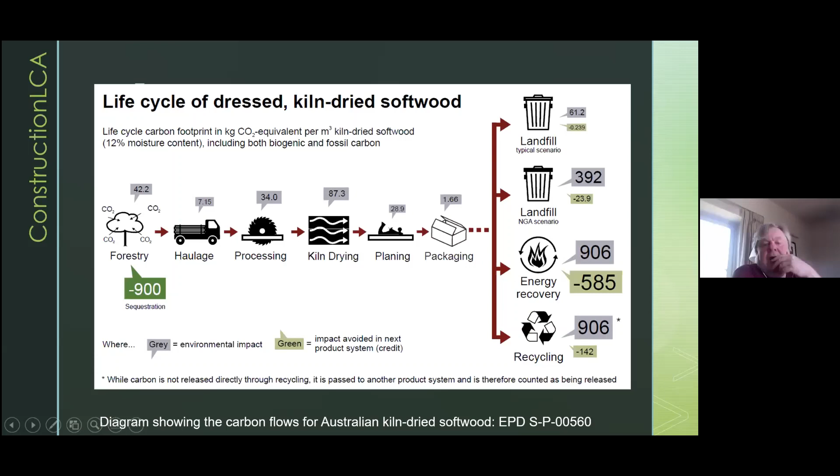So with timber, the more timber they're using to produce the product, and the less fossil fuels, that's how they can most reduce their impacts. And then you can see here the difference in the different processes, and in Australia their energy tends to be pretty bad, I'm afraid, still using quite a lot of coal. So there's a big benefit from using the waste timber for energy recovery, and not so much from recycling. But interesting. You need to be careful when you look at other EPDs, because that isn't going to be appropriate now for the UK, for example.

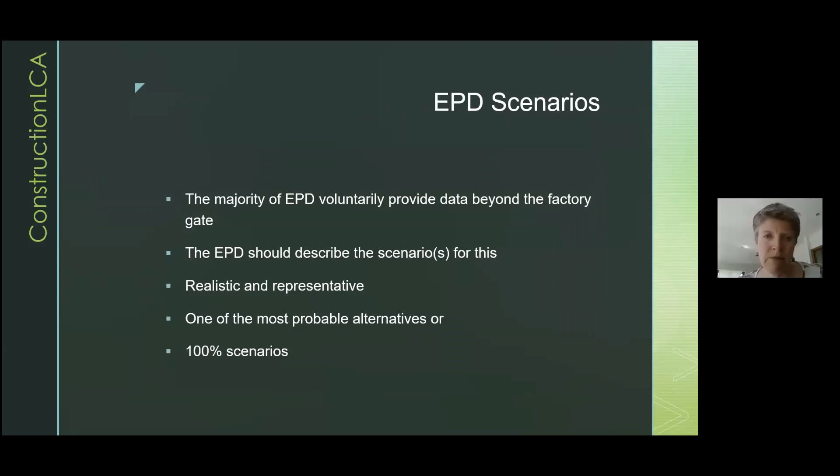Right. The EPD should always tell you what happens in the scenarios, and if you're using EPDs, you need to check: if you've got a really heavy cladding and a light cladding, then that's probably going to affect the amount of foundations and structure that you need. So you don't always just make a straight comparison between products.

Again, as we explained for the aircrete, if it affects the thermal performance of the building or the amount of thermal mass, something like that, then you really need to do it at the building level, taking into account the way that those products work, not just the product level.

You need to always check the declared units, and you might need to adapt the data so that they match. And you need to look at the life cycle. So you shouldn't compare products if they've got different scenarios at the end of life, unless that makes sense.

So when we say equivalent, if it was what typically happens in the UK, you could compare it if it's different. For example, if you were comparing brickwork with blockwork, they might assume different things. You reuse some of the brick, for example. You might not reuse the block. And if they need different ancillary materials, so for example, bricks and blocks need different amounts of mortar per metre squared, you need to think that through. You can't just compare a brick with a block.

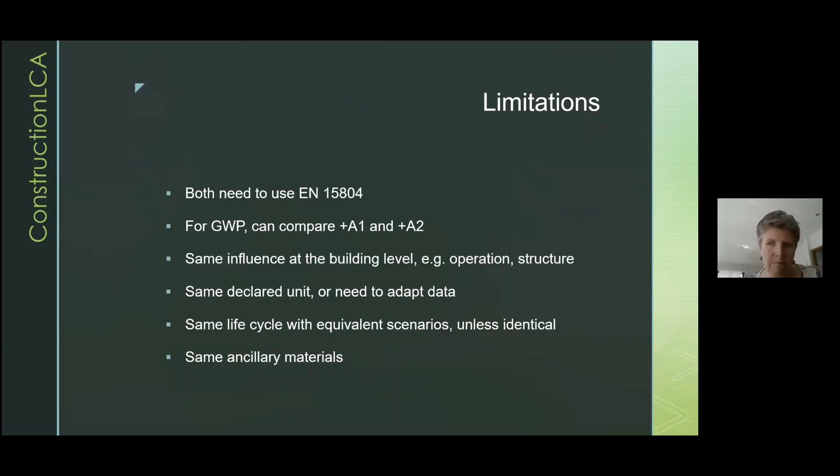Yeah. So sorry, it's been a bit of a rush through there, but hopefully that gives you an overview. I can stay a bit later if there are lots of questions. Okay.

So we've got a few questions coming in. So Richard, should we work through the open ones? Does that make sense? Yeah, of course. Which one shall we start with? Start with Sanko, who was at the top. Okay. So Sanko, we'll start with Sanko. So CIBSE TM65. We've got an event on that, but maybe you can. I'm not sure if Sanko's mic's working. Jane, do you want to? Okay.

So basically TM65, where there aren't a lot of EPDs for building services products, although there's quite a lot, for example, in the French system, and there are some. So TM65 does tell you what is there and where to look for it. And you should ask. I think basically TM65 is trying, where there isn't information, to get a less onerous way for manufacturers to at least give you some information, so you have something to use that's better than nothing.